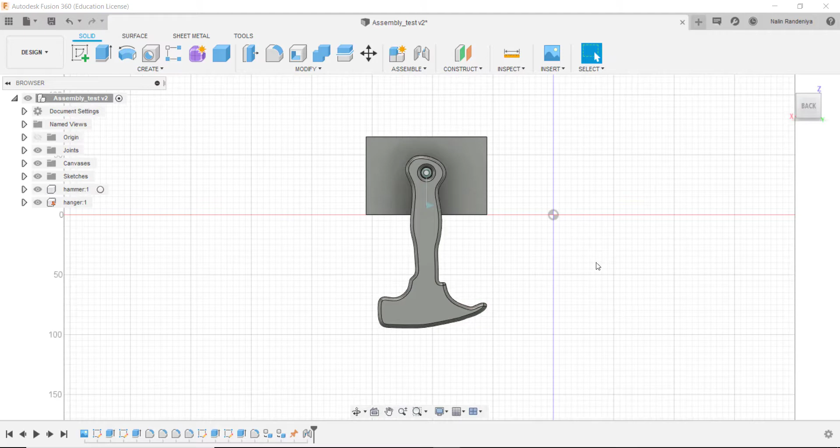In the previous video, we created this solid hammer using a sketch, and also we created this hammer hanger. All this modeling was done inside a single Fusion 360 file. If you look at the browser, you may remember we had this symbol converted into this bunch of boxes from one single box, so this indicates this file is an assembly file.

Inside there I got these components. If you want to assemble more components into this same assembly, you can always design some bodies here in the same drawing and convert them into components. But sometimes you're gonna need to bring the models from some other file and assemble them in here. So that is what I'm going to show you now.

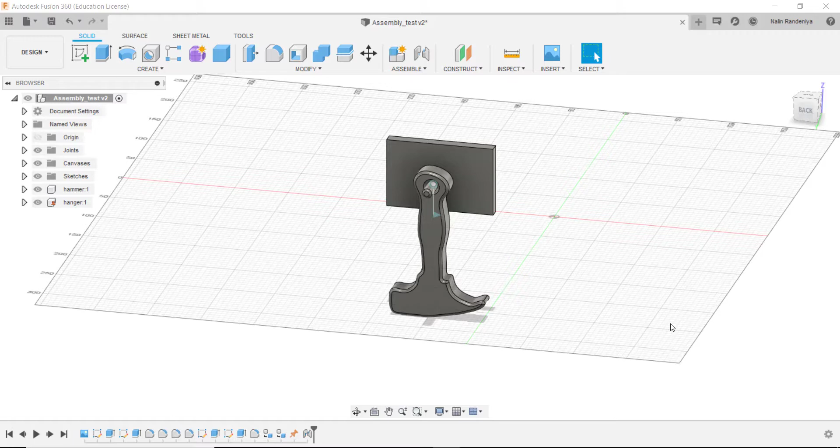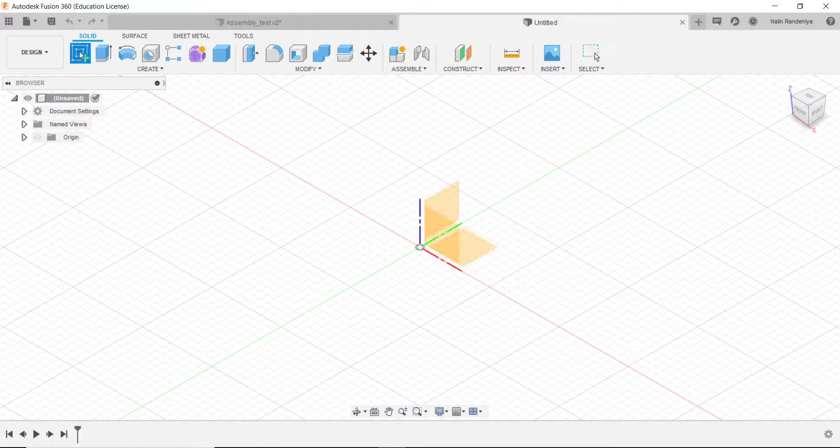So instead of creating another body here, I'm going to design like a hammer head in another drawing. I'm going to open up a new design by simply clicking on this plus sign. Then I get a new workspace here. So I simply go to sketch, select a plane, and start with a circle. I'll give it a diameter of 60.

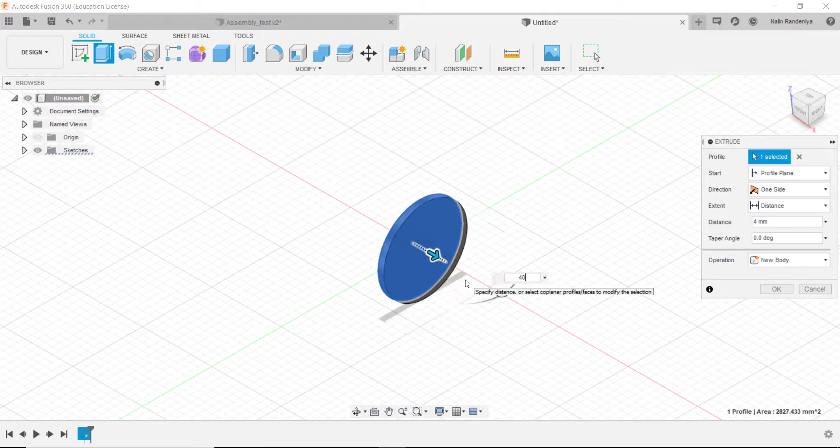Finish sketch, right click, press pull, click on the sketch, and maybe 30, 40 will do. Notice I dragged from the arrow here. If you rotate this around, you're going to see another handle, another control I have here. Notice there's like a rotation kind of handle.

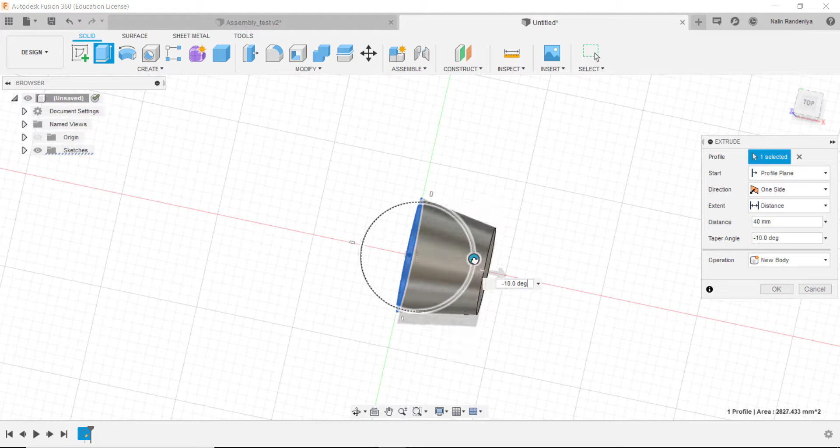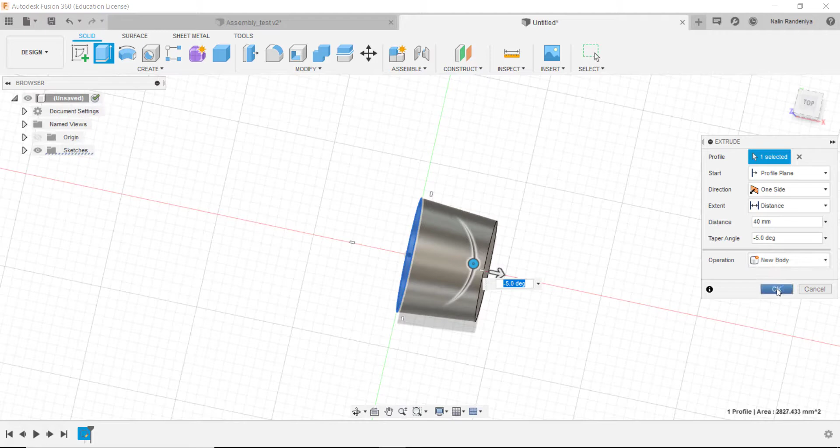If I grab and turn, you can change the draft angle, so the taper of it. This is a very important feature when you are designing something for injection molding, because you need to make sure the product you design is going to come out easily from your mold. In this case, I just show you how it's going to be changed. I'll give a little angle, maybe 5 degrees, and you can leave it as a new body, doesn't really matter. So that can be used as our hammer head.

Let's add some fillets as well. I can right click on the edge or easily go into the fillet button. So right click on the edge, press pull, does the same thing. I push it in maybe 7.5.

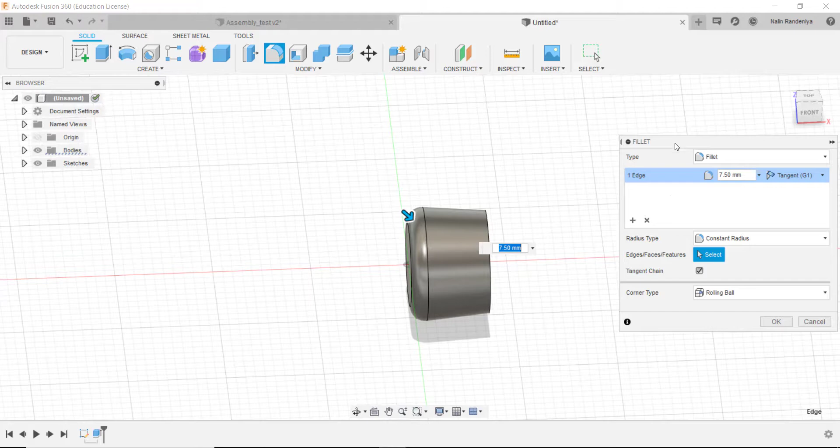Also in the fillet control dialog box here, you can add new selection, and you can click the other end, push it in maybe 5. So in the same fillet command, you can select multiple edges and also give different values as well.

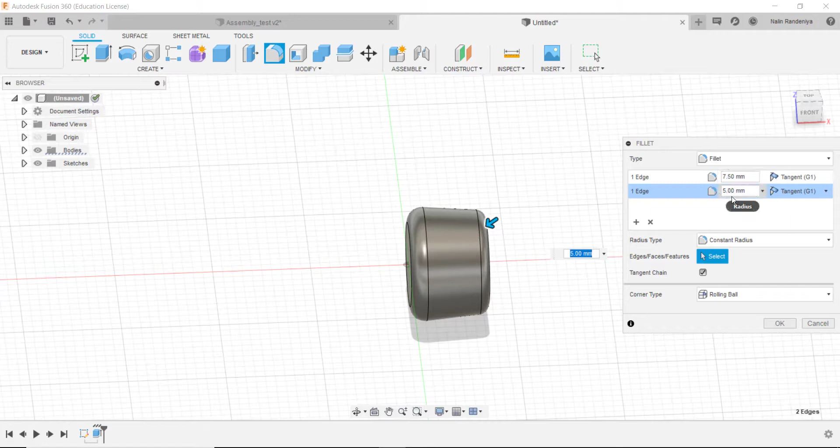Notice when I say OK, in the timeline there's only one fillet feature, but if you double click on that, if you right click edit feature, you can see I got multiple. It really includes 2 fillets with 2 different values.

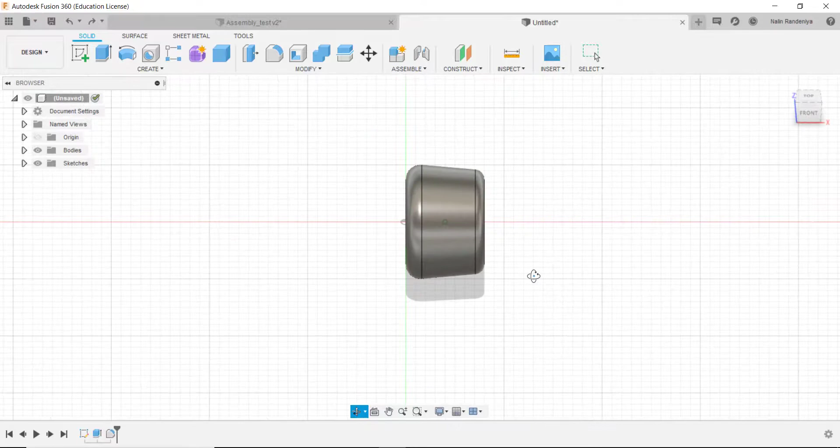Before we take this component into the assembly, let me briefly show you how to change the appearance of this by adding a material. I will go very detailed on that when we discuss the rendering lesson.

So what I'm going to do, I'll right click on this object and go to appearance. Then the appearance window pops up here. It allows me to add colors or materials to different faces or just the entire component. So I'll select the whole component.

Here I got already some appearances stored in the library. You can also go to cloud and find some more. Fusion 360 appearances, you got fabrics, glass, liquid, metal. Let me go to metal for now. Metal, and how about bronze? So that will give you a bit of a contrast.

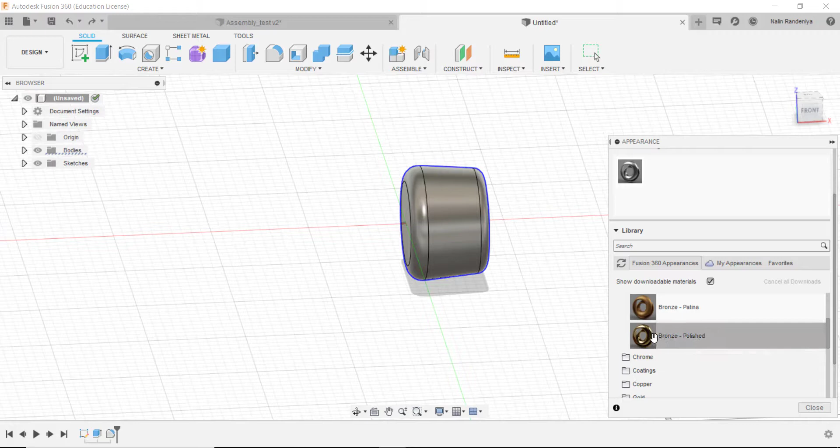Bronze patina, let's try that. Drag and drop. That's all you need to do. Just simply select the material you like, just drag and drop. That's going to get added into the object.

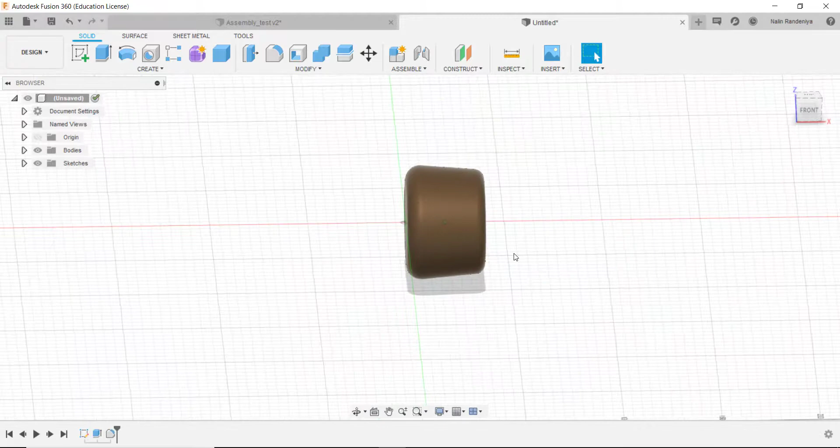So if I change the visual style to shaded, that's gonna look pretty good. Let's try appearance, let's try the shiny one. Drag and drop. Okay, I think that's much better. I just added into one face. That looks much better, look at the shine. All right, so close it.

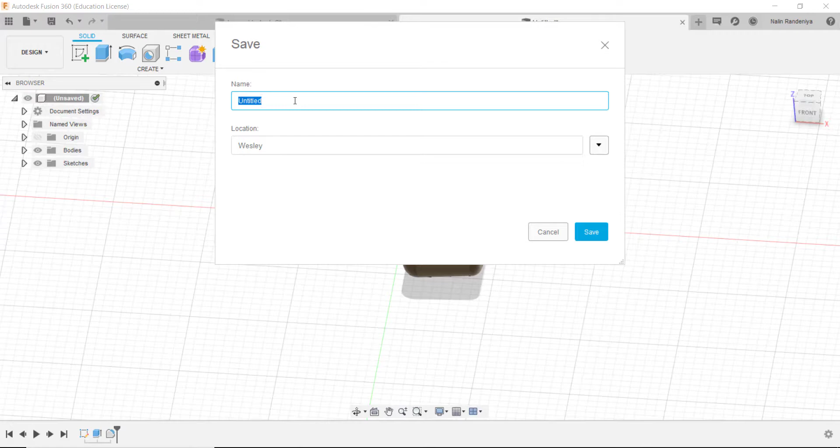Now I'll say we created our hammer head. What I'm going to do now, I'm going to save this. Save, then I give it a location and give a name. Let's say hammer head. Save it.

So now that's saved in the location right here. We call it, it's in the Wesley folder in my data panel. Go double click, it's right there. So now I'm going to go in, so I can close this file now.

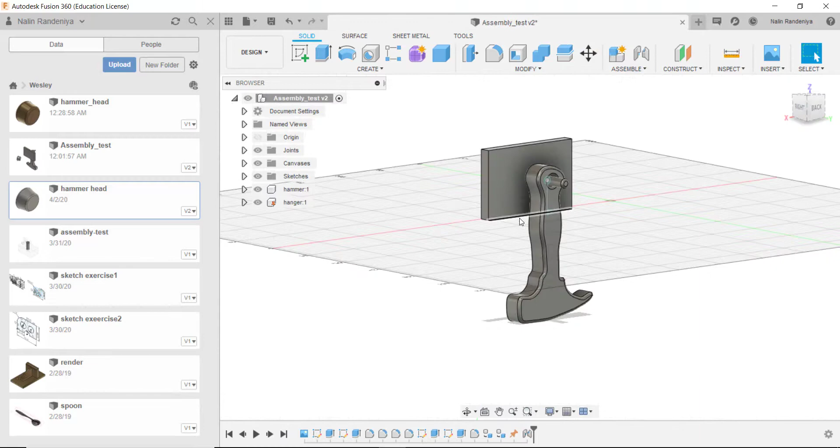So when I go into my assembly, so far all these components are built inside this file itself. So now I go to the data panel, find the object I want to add into this, right click on there, and select insert to current design. Click on that—it might take some time to import into this file, and there it is.

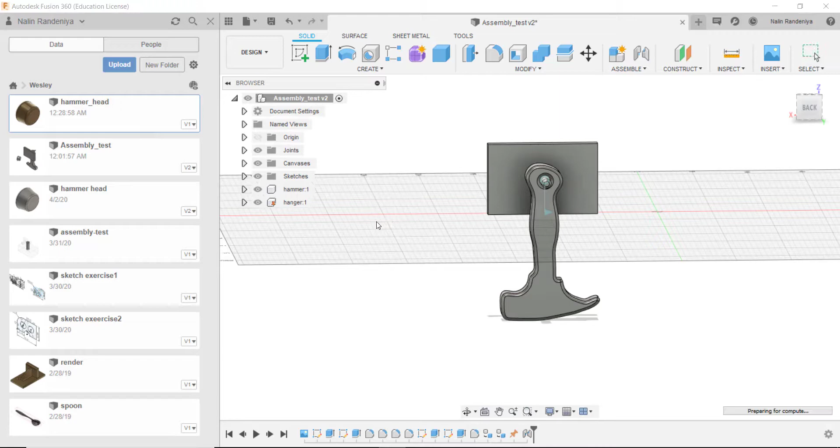So now that's added into there. You can position it if you like, you can rotate it, if that really matters. But in this case, I'm going to directly assemble it into this hammer.

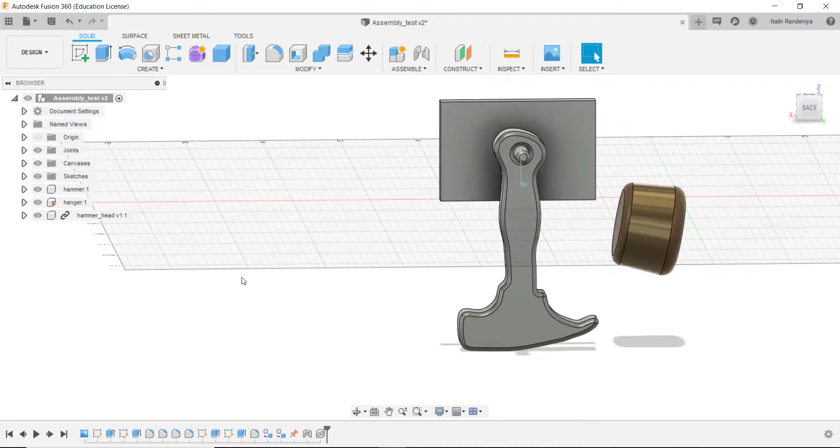I'll say OK. One thing I'd like you to notice here in the browser: notice there's a little chain mark saying that is a link. That indicates that particular object—when I click on that, it will highlight—is not built inside here. That is linking with another external file.

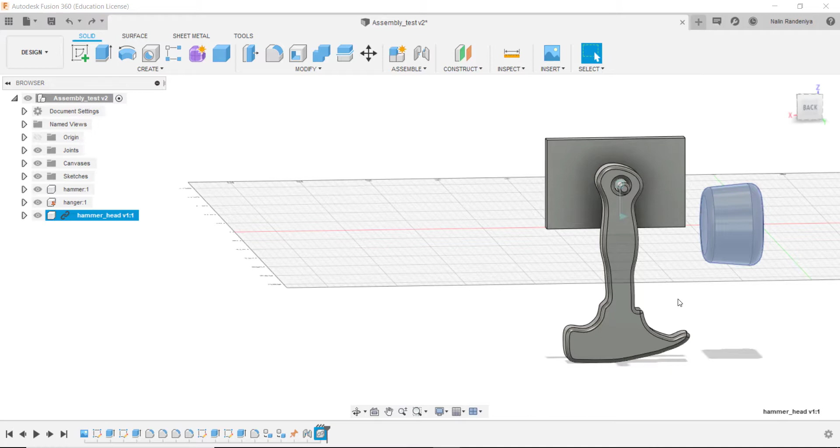Okay, let's go ahead and assemble this hammer head into the hammer. I'm going to click on joint, then I'll select one of the faces in the hammer.

Then when I try to select the hammer head, okay, there's no reference in here to select. That's going to be a bit of a problem because I can't find any proper reference in my hammer to align that with the new component.

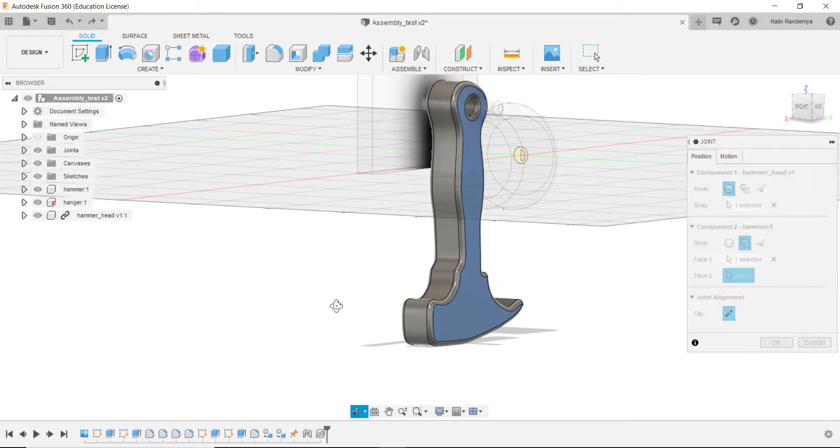So I could select the edges, or I could select two faces—this face and the other face. That will still be asking me to find another point as the second reference. So it doesn't really work for me in this case.

So what I'm going to show you here—let me cancel out of this and come out of this. I'm going to show you how we're going to isolate one of these components built in this assembly file to make some changes during the process of assembling.

Example: now I need to make a change in this hammer. How are we going to make that edit? In that case, notice this little radio button here, activate component. This button means now this whole assembly is active.

But if you look at other components, if you hover over them, you can see they all show this button, but they are not active. Anything that's built in this file has this radio button.

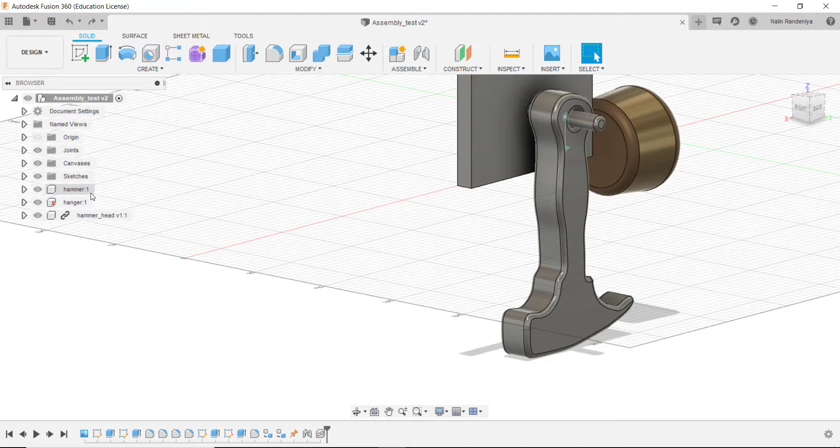If I click on this hammer, click on that, now the hammer is active. Others are just appearing there in the background, but you can't do much changes in there—they happen to just sit there. So now this is pretty much like the early stage of this file, while we are designing this hammer.

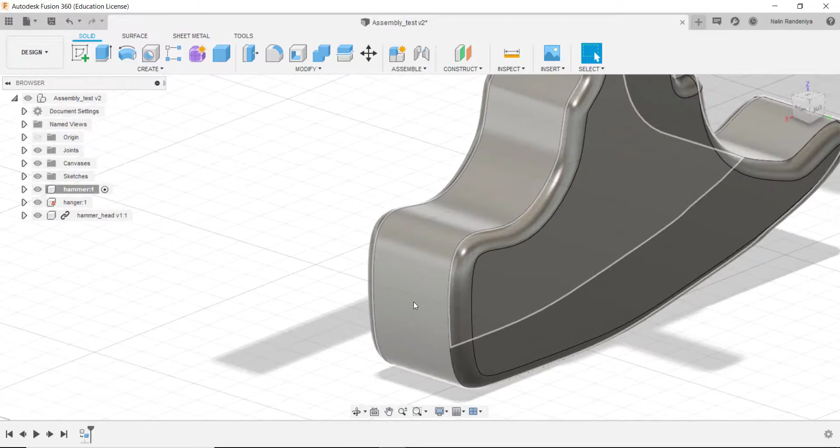What I'm going to do now is add a point at the end of this hammer, so we can use that as a reference when we go to assemble the hammer head into it.

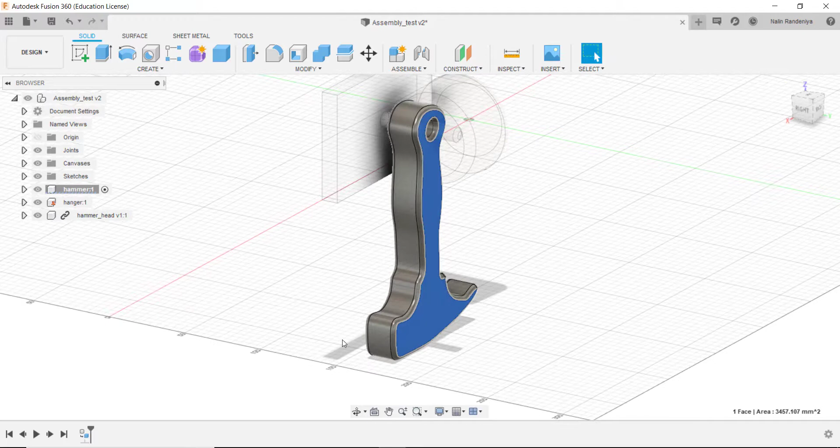But the problem is, this is not a face I can select and make a sketch on. It's different from the other flat faces here, because this is an organic shape made out of a spline. If I try to do that—let's see, I go to sketch—nope, it doesn't allow me to select that hammerhead. I finish the sketch, right click, and delete this one.

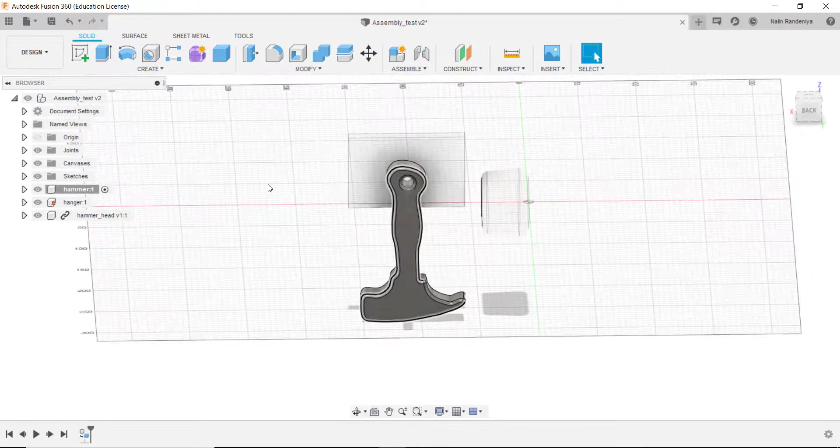And there's no plane here either. All the planes are intersecting on this origin here. If I make the origin appear by clicking on this eye symbol, there you go—so those are the planes. So you can make sketches on a plane or a face.

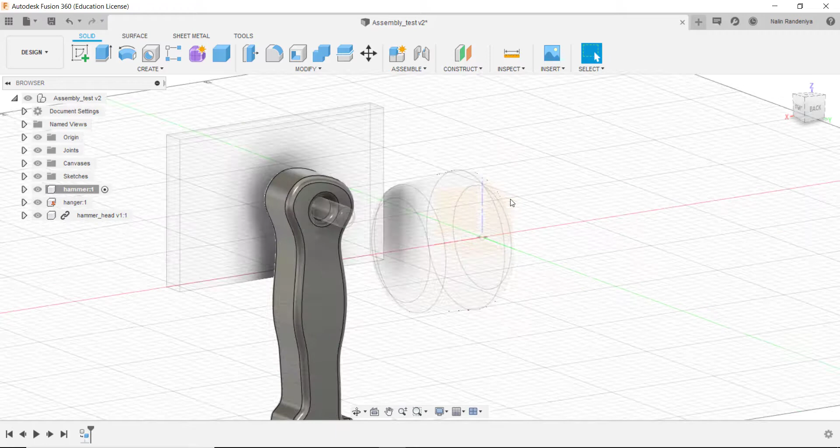So what I'm going to do is create another plane here—basically make an offset plane of this particular plane on this level. That way I can create an artificial canvas. This is done through construct, offset plane. So I click on this construct offset plane.

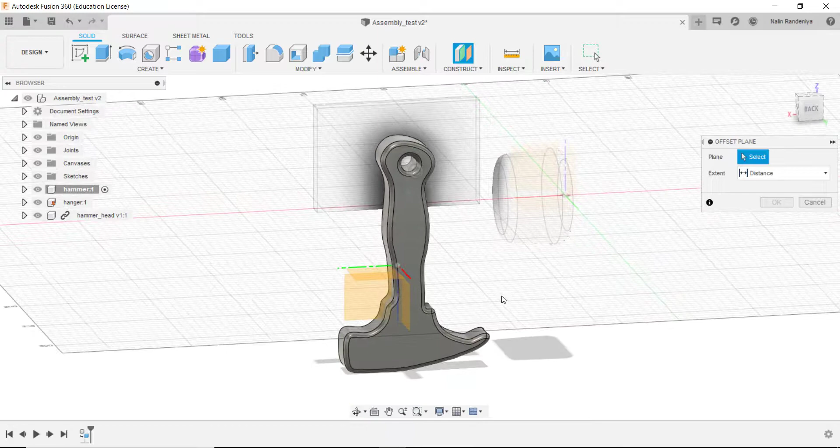Now it's going to ask me to select a reference, so I'll select this plane here, because this is the origin for the hammer. In this case, I'm just going to eyeball it because I just need a rough location for the point, since I can adjust it in the joint when they come together.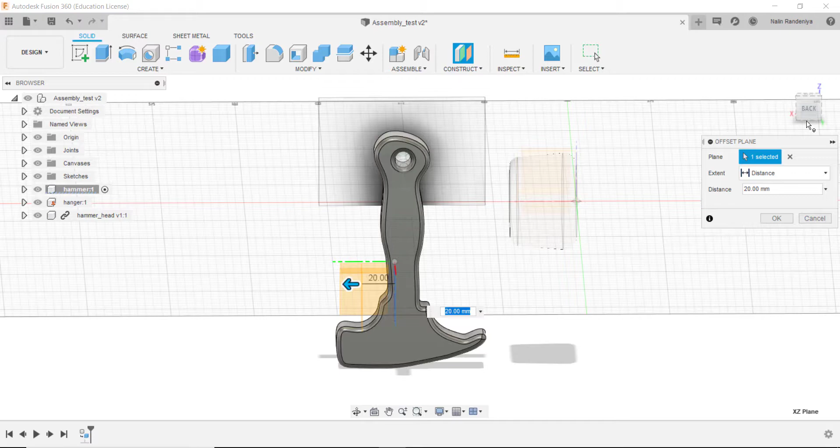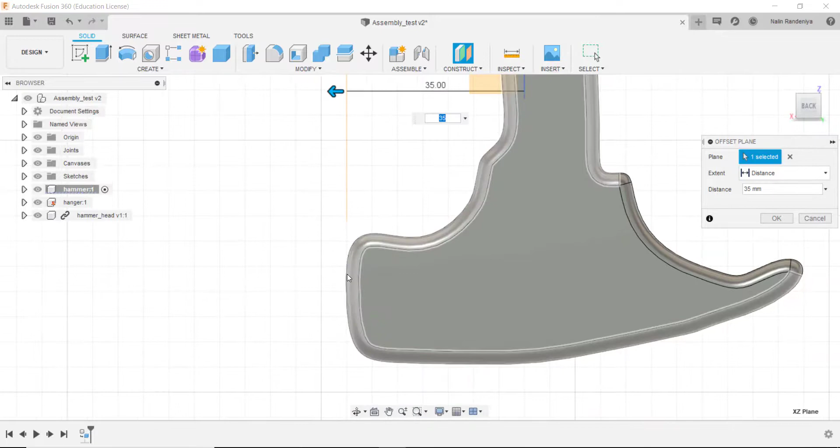Make sure you go into a view where you can clearly see the intersection. Move it further forward—I think 35 does a very good job. It's almost at the edge. So 35, okay, that's fine.

Click on OK. Now I've created the new canvas, pretty much a new plane. What I'm going to do now is click on create sketch, then select this plane. Now there you go, I'm ready to create a sketch on that plane.

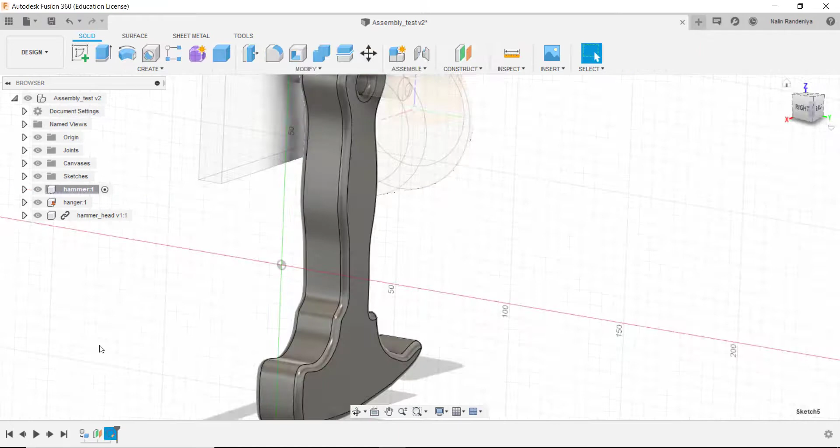So look again—sorry, oops, there you go. All right, so I can see, okay, that is where the hammer head is. I'm gonna go create a point. That's all I want. Click on point.

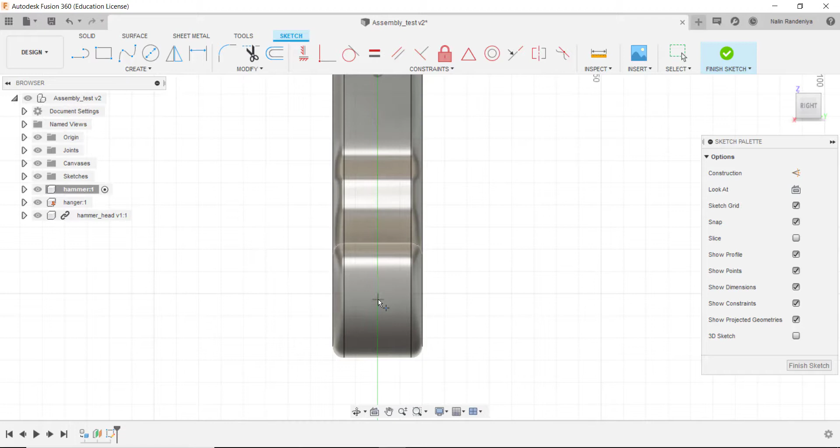I'm going to use this mesh to guide me. That seemed to be the symmetric position right here. Just give it a click, finish sketch. That is all I want. If I rotate around, now I can see I have created a point.

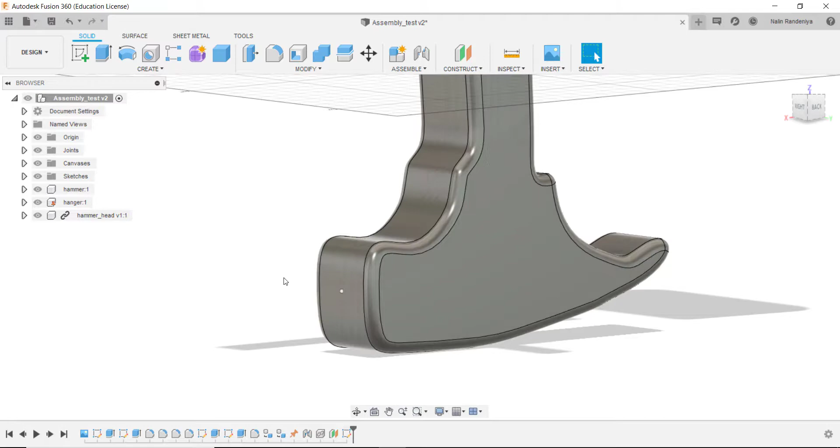I'm going to use that as a reference here. So now simply what I can do is go to assembly in the browser, click on this radio button, and activate the entire assembly. But that dot, it's going to be there because that was done in the process of assembling. Alright, so now I got the hammer head. I can hide the origin.

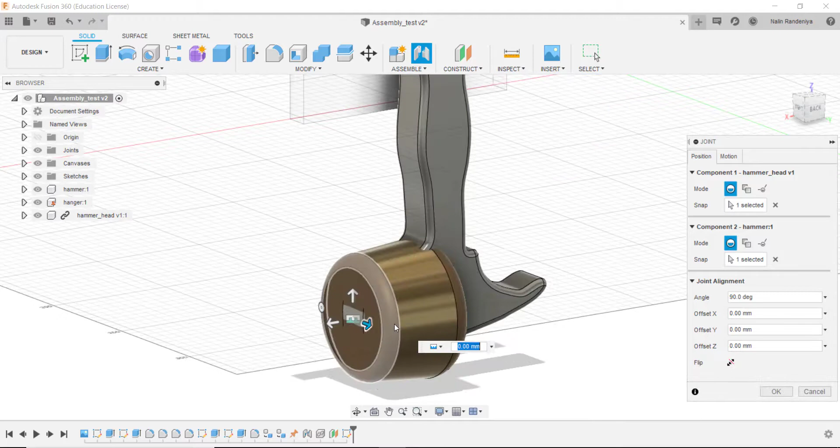Good. Alright, so now I can go to joint, click on this face, and simply click on the point. Alright, it came to... okay, was like that. You can simply click on this flip button. It's gonna flip the side, and you can push it back how you like, and it's quite a bit out of proportion, but no big deal.

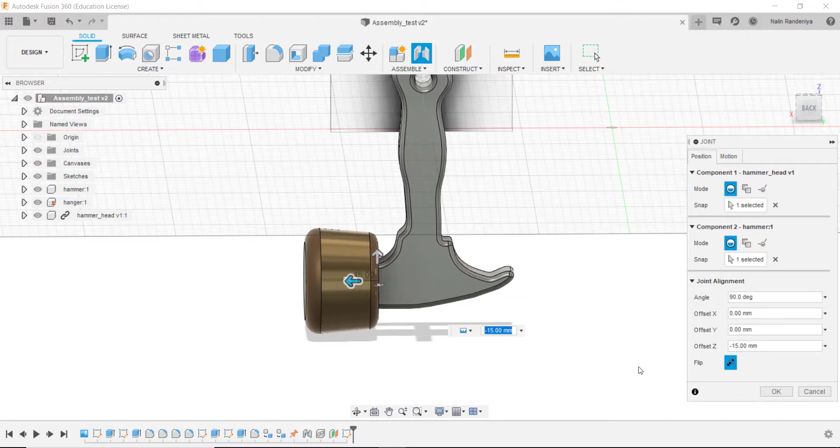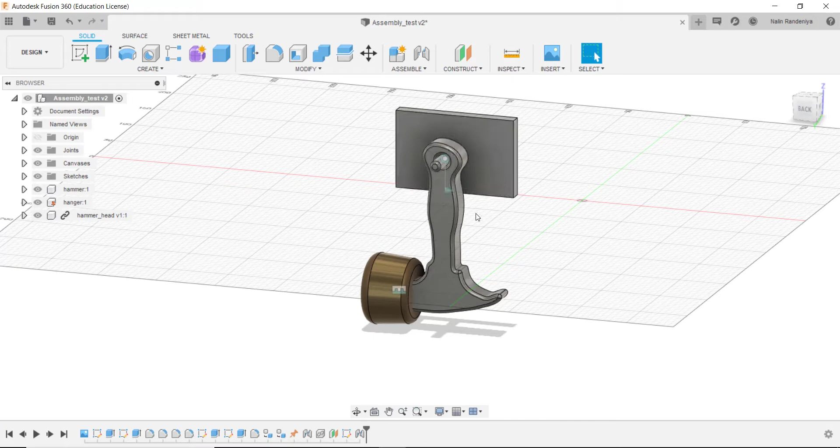Say okay. This gives me another opportunity to show you how the editing and updating works. So what do I mean by that? So now I already showed you how to make an edit on one of the components designed inside this same file. But this hammerhead was done somewhere else and it's linked.

So you can always go into that file. You can go to that file by right clicking that particular component in the browser, right click and open. Then you can see the background—there it is in the background. So that file opens up in a new tab.

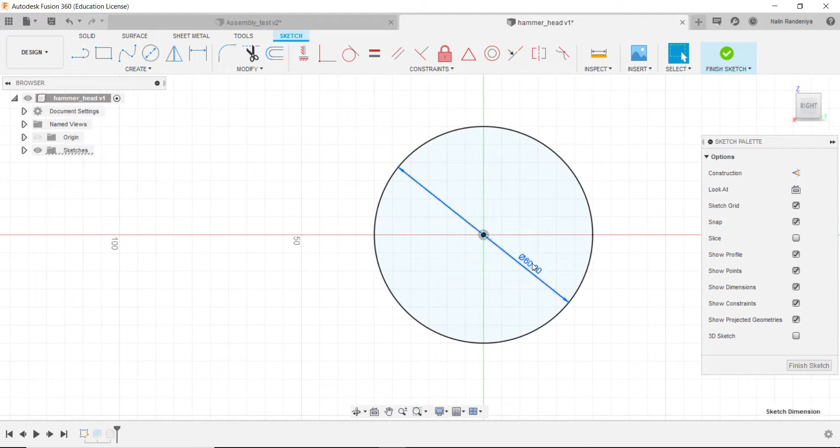So what I can do now is simply go to the sketch, right click, edit sketch. I can reduce it by simply double clicking and maybe go to 45, enter, finish sketch. Now that's automatically updated. Also, I can change the extrusion as well.

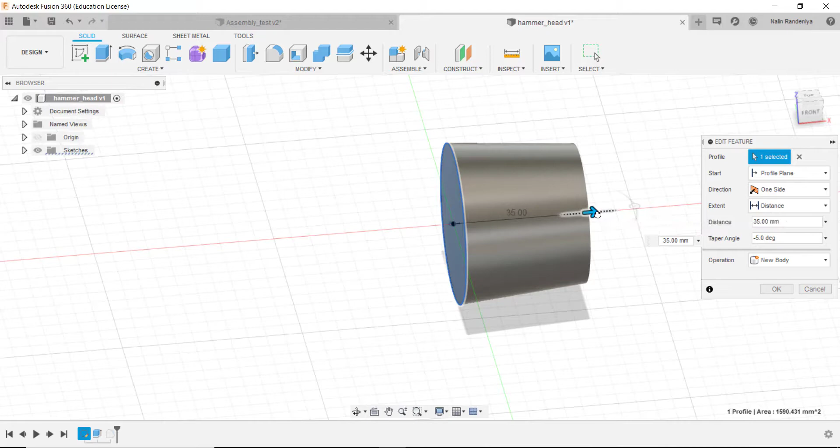Edit feature—45, 40 seem to be a bit too much. 35, yeah, that should be okay. Done. So now we've made the change and I can save it as well.

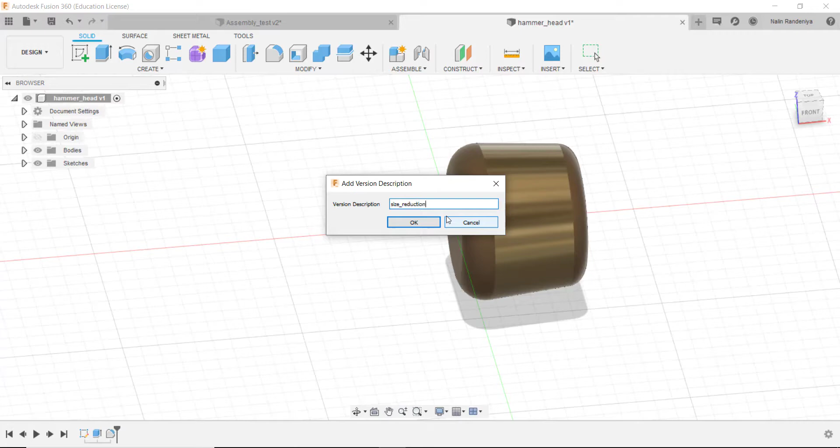And the other beautiful thing I can show you here is that Fusion is keeping track of the changes you make. You can also give some explanation of what change you made in that particular revision. So in this case, I'll make size reduction, and say do OK.

And when you go into this data panel, now we can see it's updating. Notice what happens here—it's updating, you can see it's turning, and now it's V2. It was V1 before, now it's V2. If you click on that, it tells me what the changes are. So the first version, item created. The second version, size reduction. It tells you the timestamp as well.

It also tells you users and used in—what documents we have used in. So probably I didn't have it saved there, that's why. So this is the history. It shows me the version history and everything inside the data panel.

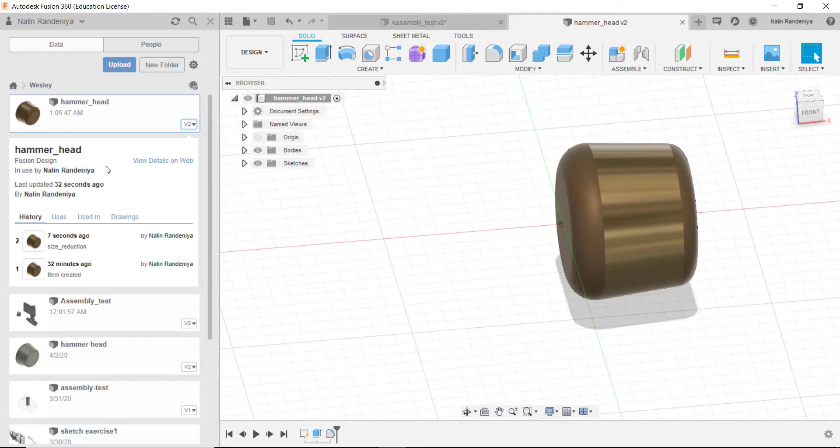So let's go into the assembly file. Look what happens here—even though I saved. Let me save this one, and no, that's not there. See, I got this warning saying that this component is out of date.

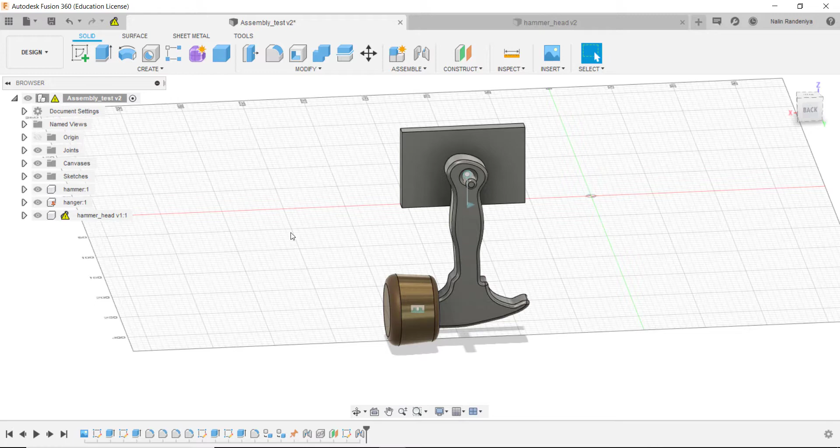There will be a warning appear here as well soon, saying that this file got the message that this particular component has been updated, but it's not updated in this file. So we need to do it manually by right clicking on the component and choosing get latest. Click on get latest and notice how that change reflects in the model visibly. Get latest, and it's happening. There you go. Now that looks perfect, isn't it?

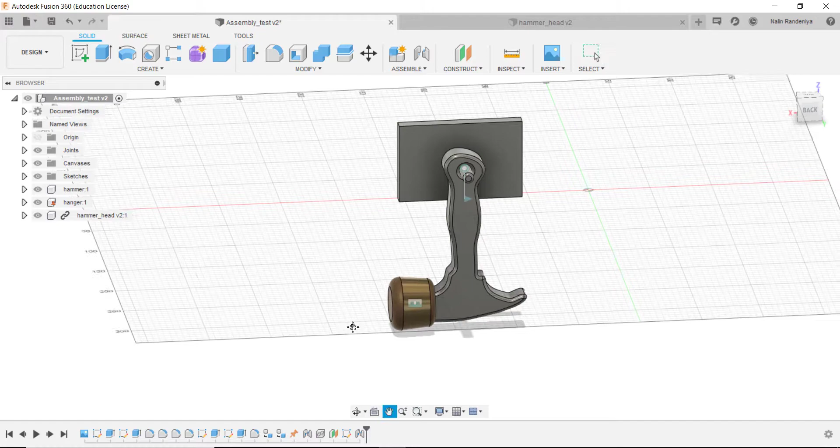That's a hammerhead. Nicely done.

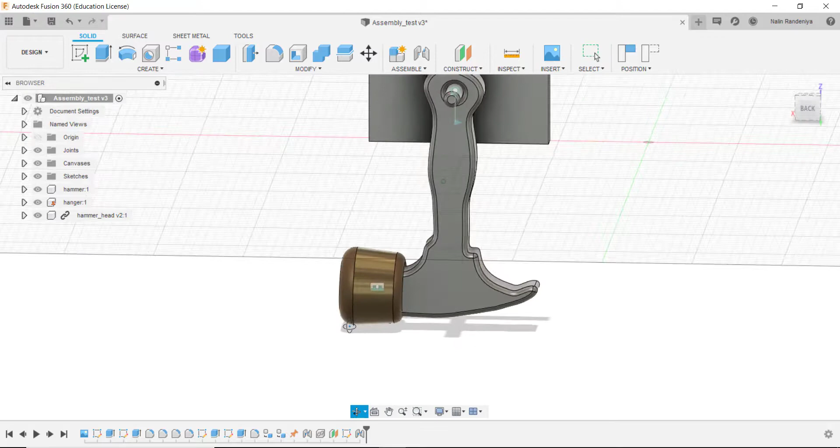Okay, so in this assembly, even though I just put this hammer and the hammerhead together like that to match up with the locations here, assembling two parts together in the real world takes some process - either welding or using some fasteners like nuts and bolts. So I looked at some of your concepts and realized some of your designs might need that sort of hardware.

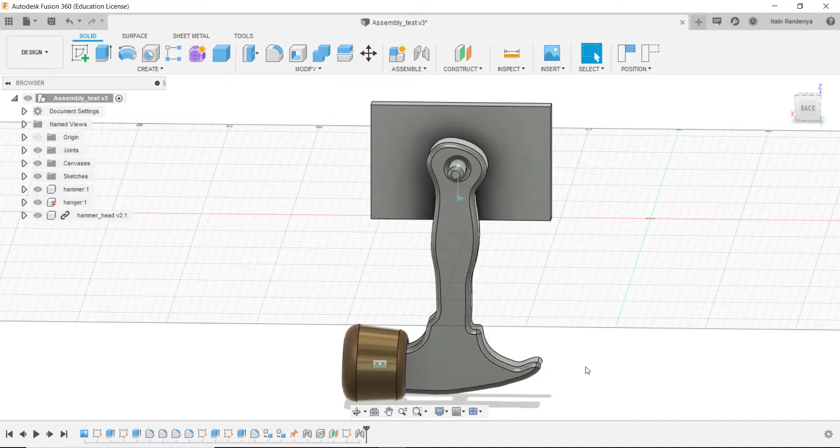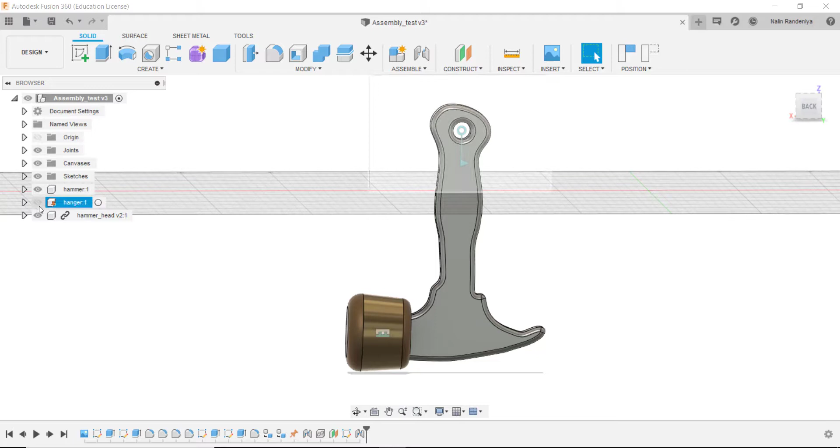I'm going to show you how we're going to mount this hammer hanger, assuming it gets mounted into the wall. Let's go ahead and work on that part. In that process, I'm going to hide this hammer by clicking on this eye, hiding the hammer and the hammer head, and directly work on this part now.

Okay, the process of mounting this hammer hanger into the wall - my plan is creating 4 holes in these 4 corners and using 4 countersink bolts to put through this block and tighten to the wall. If you haven't heard of a countersink bolt before, wait around - in 5 minutes you're gonna learn that.

Those nuts and bolts have some standard sizes, and we shouldn't have to design them from scratch because they must be available - they are standard things that you can buy from hardware stores.

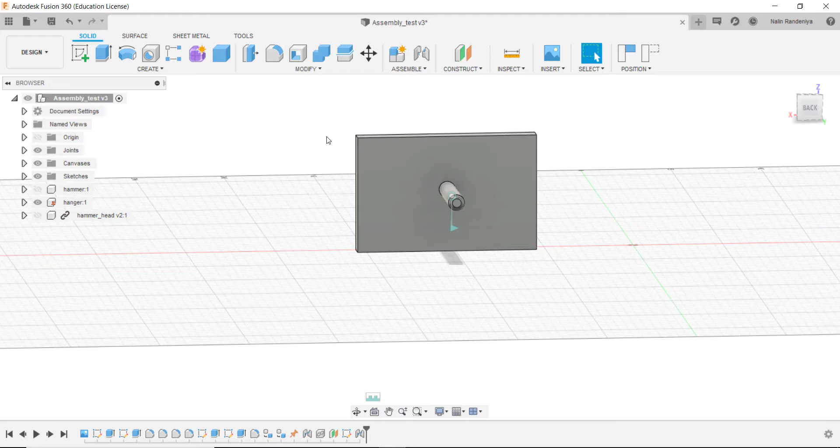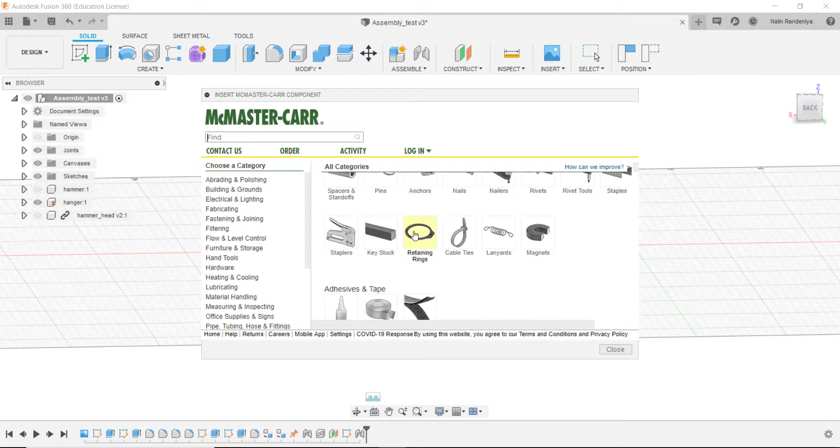Luckily, Fusion 360 has a built-in library that's connected with a supplier called McMaster-Carr, a leading fastener or hardware provider in the United States. They have their inventory built in here - you can use all their CAD designs of these fasteners, and you can also buy through this app as well.

But I'm not sure how the purchasing is going to work when you select them from here in Australia. At this point, let's work on how to download a CAD of a countersink bolt.

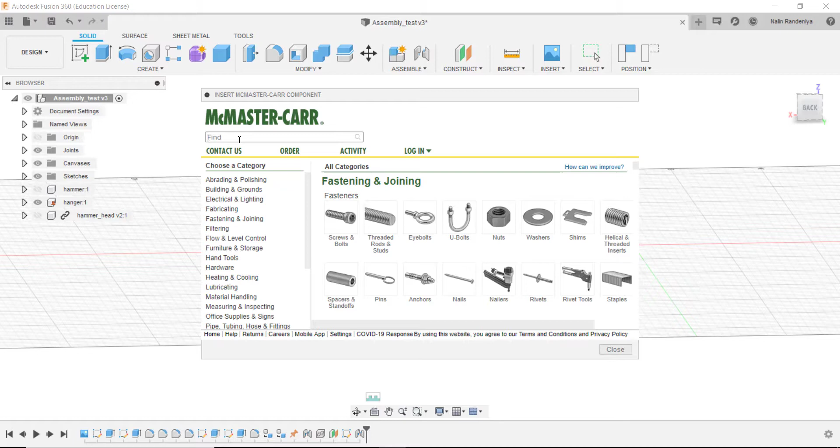First of all, when you go to this find search bar, I'll type bolts. Okay, so then I get different types of bolt - hex head, socket head, and rounded, which we call a button head as well, rounded head screws. And these are the ones we called - so it's a flat head screw, and this head is a countersink.

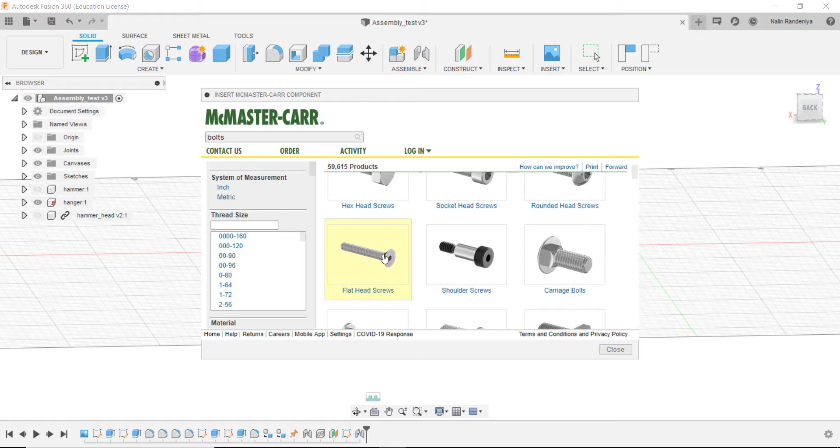Let's go select that, flathead screws, and then we select what sort of screw head we like. So let's go ahead and select this flathead screw. In my case, it's important for the screw to be flush with the face, so that's the reason I go with this countersink.

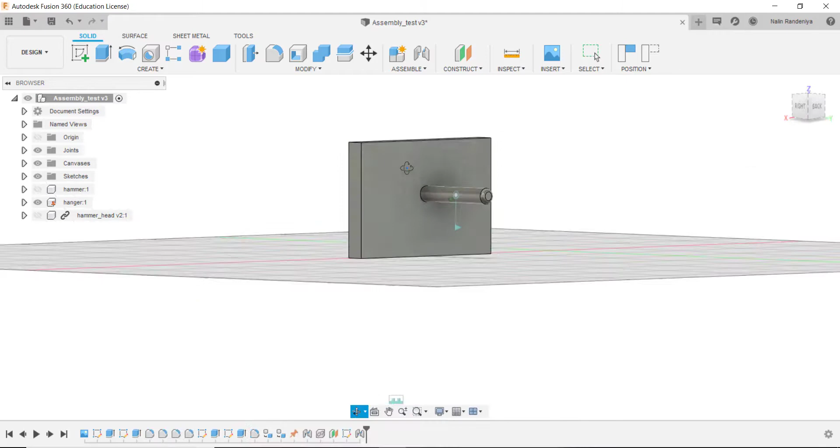All right, so in here I'm not going to be very specific, because in my case I just need a graphical representation. But if you're working on a carefully calculated advanced project, you might be worried about some of these properties - for example, the technical details here.

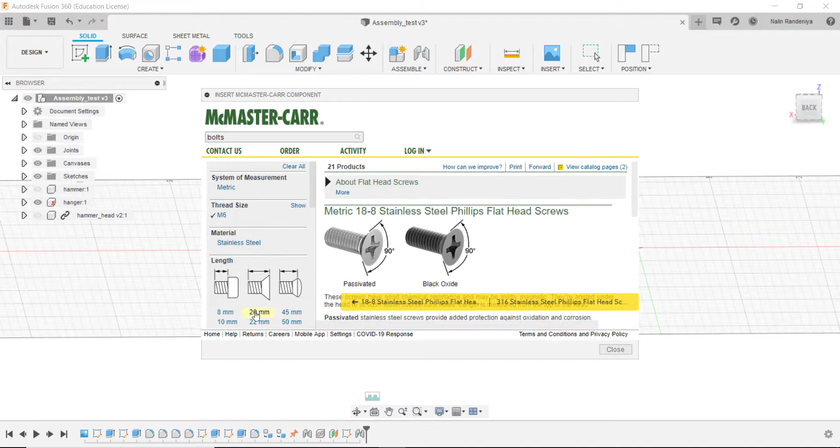Let me go ahead and select the thread size. I'll go with M6 - that has a 6 mil width on this threaded body. And also the length, I think 20 mil will do the job. Okay, so then a certain bolt type has been selected.

So I go to the product detail and follow these instructions if you want to download a CAD file. This will have all the technical details, the pressure it can take, most of the technical details a designer will want, and the pricing as well - pack of 50, oh, not bad.

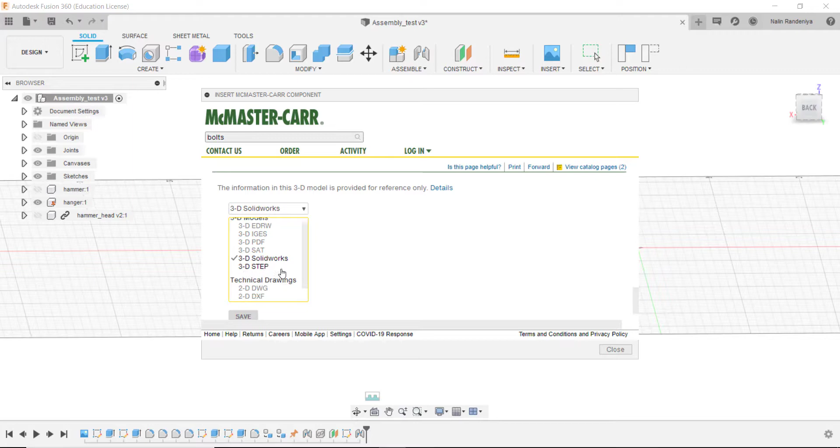Then when you scroll down, you're going to see information on the 3D model. You get to select the file type - I don't want the SolidWorks, I'll take the step. So STEP is kind of like a generic file type, step or IGES - 3D files that can be used by any CAD platform. So I'll go with the step 3D and save.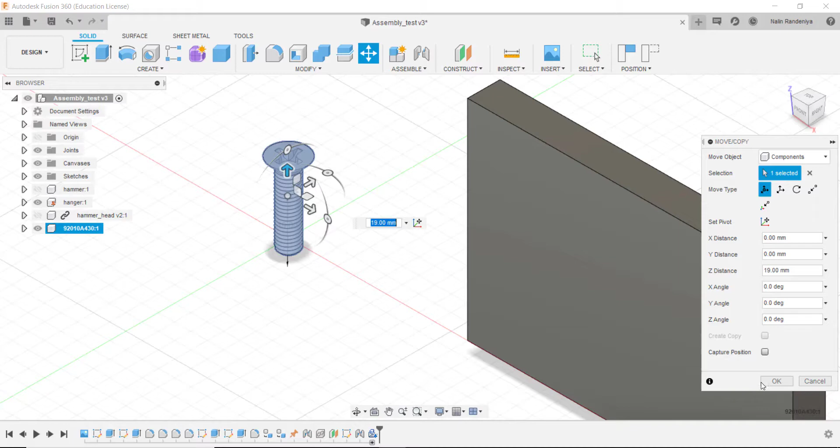Then what happens? That bolt magically appears in a second, boom, like that. So that is the bolt I just selected. You can position it however you like, but in this case I'm just going to click OK because I will position it through a joint.

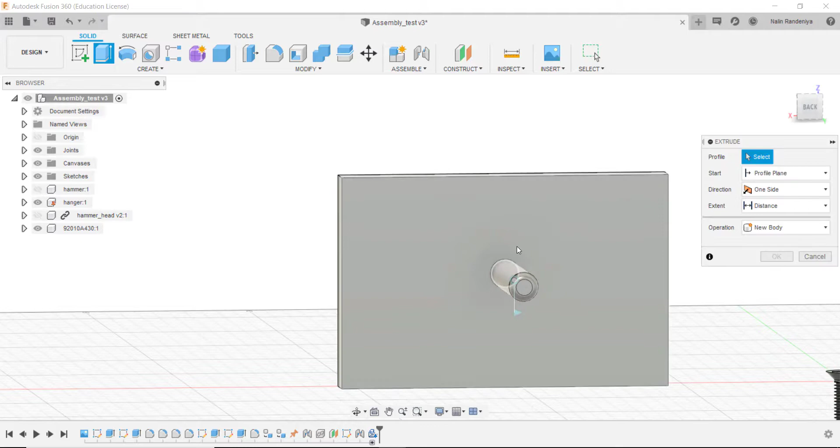All right, so now that we've got this bolt imported, let's make the hole. That's a very important task - you're learning how to create holes in this face. You already know how to use the extrude tool, you can use it simply.

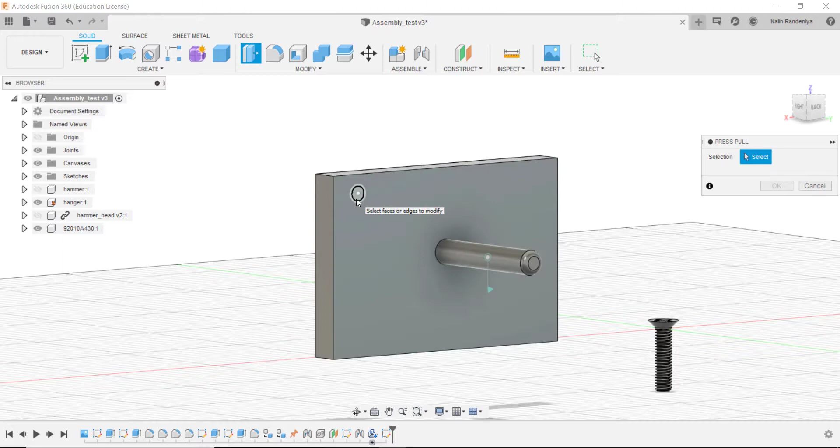You can do a sketch on this face, okay, and make a circle with a given diameter, and you can simply click on this new sketch, right click, press pull, select that sketch, push it inside and say okay. That's just a hole, that will do the job.

Yeah, but we need to learn a bit more advanced than that. So I'm going to undo that and get rid of this sketch. I'm going to show you how to add a proper hole, a standardized hole that is designed for a specific fastener. That is done through this hole feature right here.

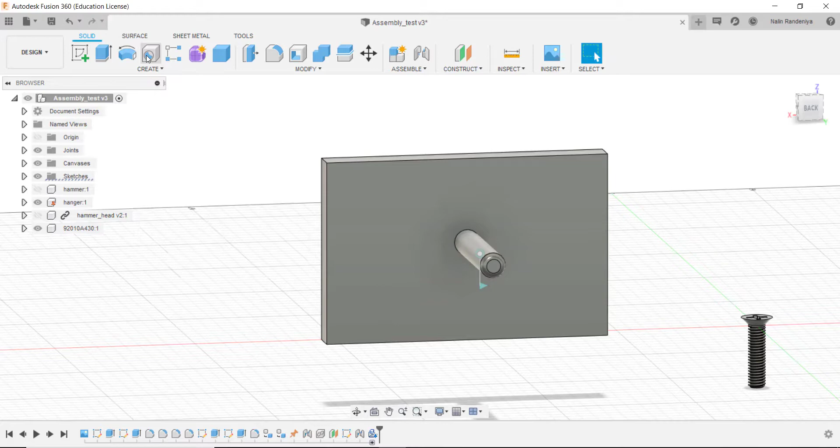So I click on hole, then I get to select placement. I've got multiple or single, so I'll go with single for now. Then face, I will select that face. Oof, it already picked up some dimensions, but let's not worry about that.

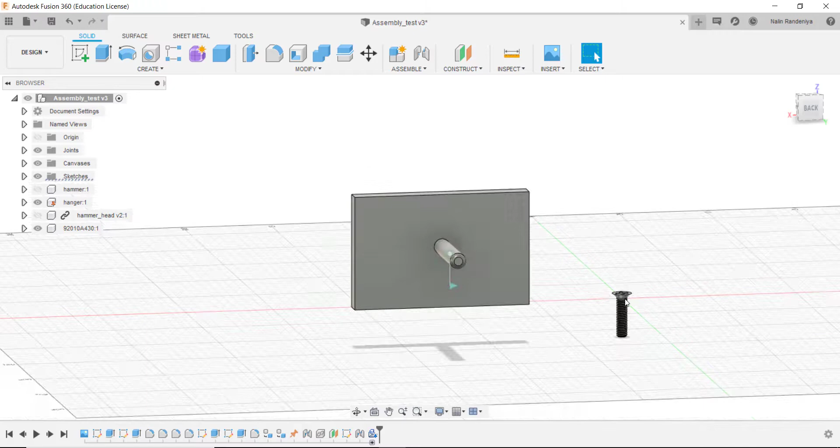Before that, I forgot - I need to measure some of the features of this bolt here. This is a good example for you to learn the measuring tab, how do you measure some features here. You may have seen this already, this measure tool, which basically does the measuring.

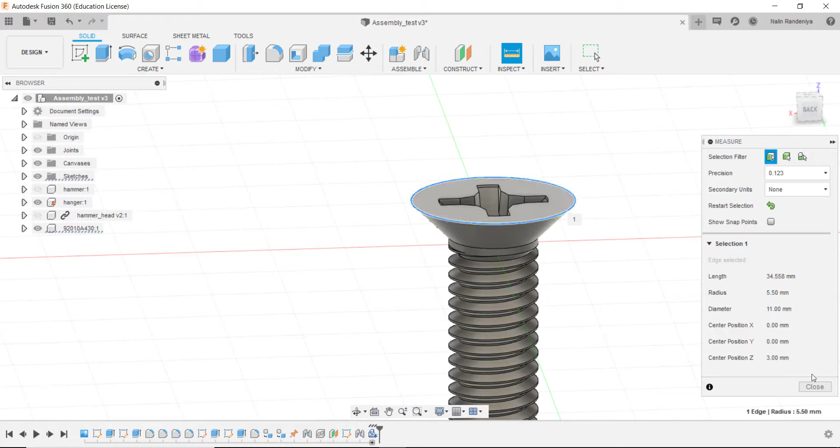So click on the measure tool. Now you get to select different features of this. I'm going to select the outer diameter, and that is 11 millimeters. Okay, close. And also we select this edge right here, that is 6 millimeters. So now I have a rough idea of what dimensions to provide when the hole feature is asking me.

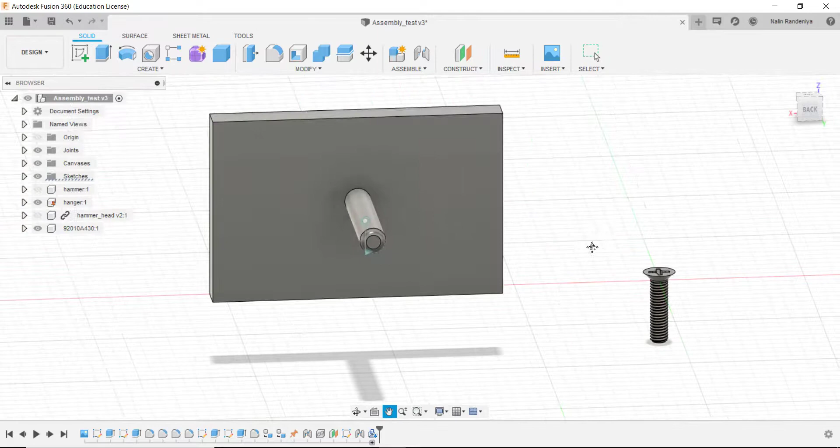Okay, so I'm gonna select that face, and reference - I'll do that later on. So for hole type, I'll select countersink. If you look closer, you can see the differences here. This is a simple hole, not much different from just a simple extrude like what we did before.

Then the counter bore, it's basically for a socket screw, because it has a cylindrical head that can sit in there, still giving you a flush head with the face. The countersink actually has a 90-degree connection between these two faces, and this takes less material off, so most designers prefer this type of bolt.

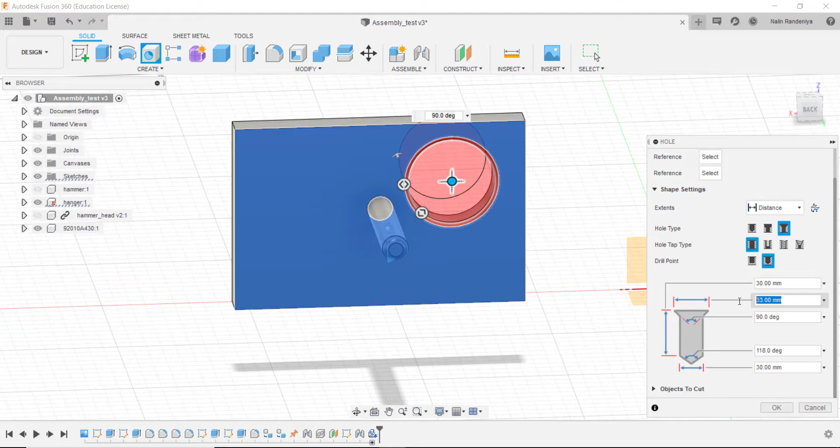So let's go with countersink, and then these other dimensions. The width, the diameter of the head, that was 11 as we measured. Then this was 90 degrees, of course, for this countersink.

Then the body width - let's have this a bit more than 11, so it can nicely sit in there without hovering over that. And the width of it, we can have 6, but it's going to be a very tight fit. In my case, this is not the face that's going to be threaded - the threaded face is going to be the wall behind this block. This block will just be a hole, not threaded, so I'm going to have a clearance of maybe 7 mil.

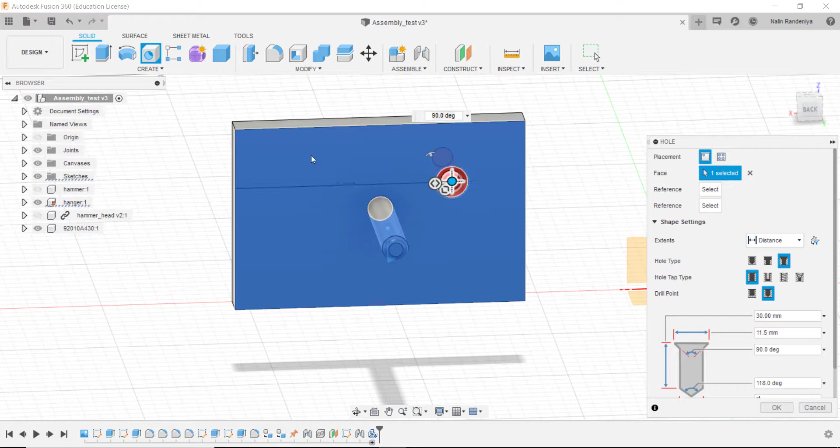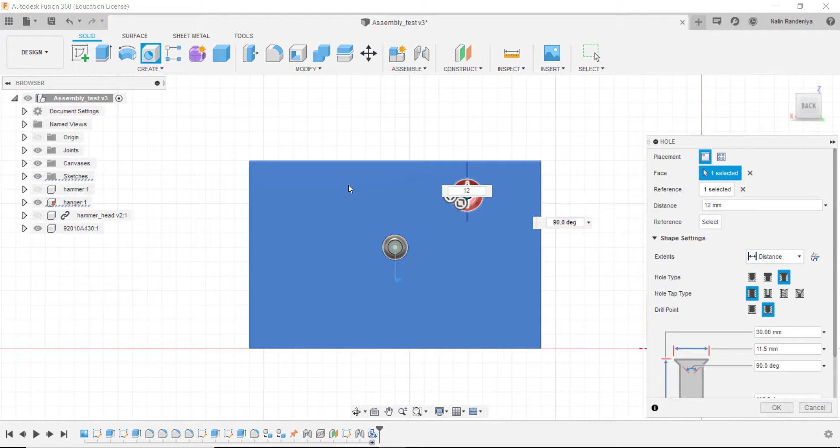That will do. Okay, so now I go to the reference, then it comes for the placement. I'll look at it in a perpendicular way. Good. References - I'll select this edge. From there I'll take that's 20, so maybe 10... okay, 12. Then the second reference from that face, I'll take it 15. Done, there it is - that's my countersunk hole.

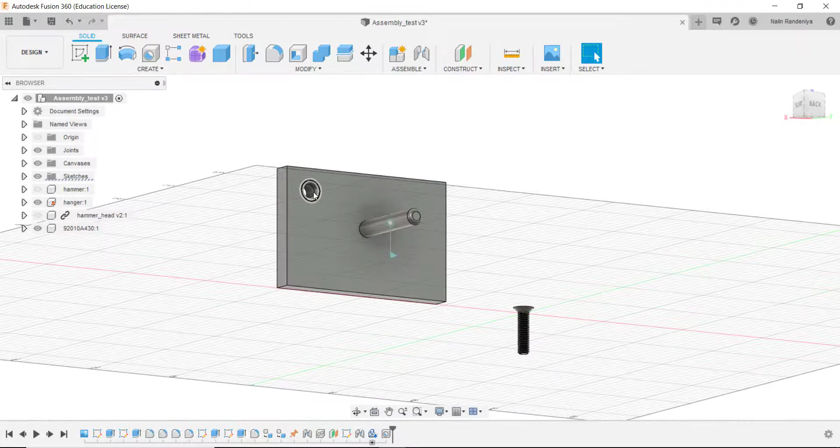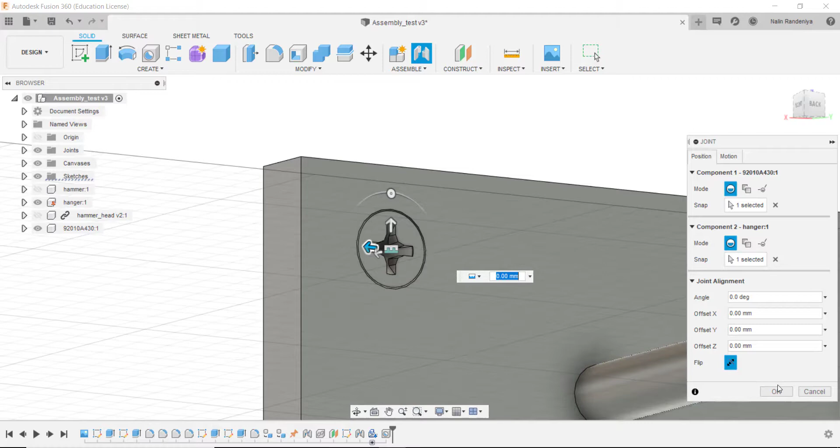Okay, so the next job is bringing this one in there. That's a simple joint, isn't it? So go to joint - I'm going to choose this conical face here, that conical face gets aligned with this conical face, and boom, there it is. Just click OK - that's a nice assembly right there.

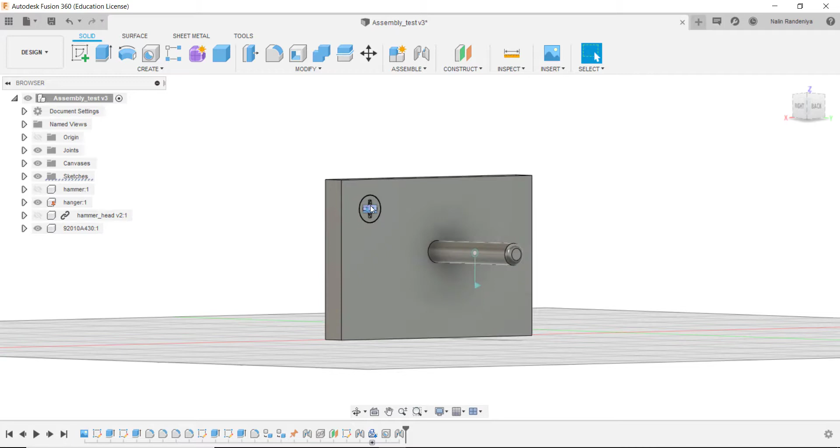Okay, so now this is ready to go to the wall when we have 3 other bolts here. In the next video, I'll show you how we use the mirror tool to simply mirror them across the other 3 positions, rather than doing all these steps all over again. There are also some other features I want to talk to you about, like revolving, patterning, and some other features that I think will be important for your projects. All right, so I'll see you in the next one. Thank you very much.